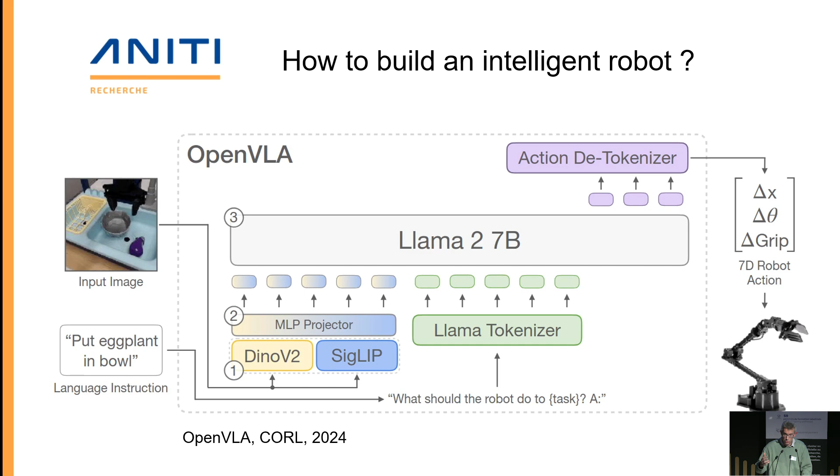But what I will try to briefly tell you is what we think is working, in the light of use cases and requirements which were actually gathered during an industrial panel with companies. We had Schaeffler, the French National Railway, Renault, Airbus, Thales, Robotics Place, and Safran gathering together to give us insight into what they are expecting from us.

So of course, what they would like to have is to be able to replace humans on repetitive tasks where you have, for example, musculoskeletal disorders. We would like to avoid exposure to risks, like for example inspecting railways in a very dangerous situation.

Something we found out very often, for example for Airbus or manufacturing, is the need for flexibility and agility. For example, customers ask for new batches of, say, shells for a cell phone, which you want to customize for a company anniversary. Then you need this flexibility and agility.

And then the last very important point is compliance. There are new regulations, and you need to make sure that your robots are certifiable.

Then in terms of features, they want to have speed, and you will see that it's difficult to get, especially with diffusion processes. They are super, super slow, as I will show.

In terms of imitation learning, what people would like is that right now, if you want your robot doing a backflip, like previous hydraulic humanoid robots, you need a PhD and 2 years of experience with the robot to do that. Whereas what people would like to see is just natural interaction and the robot performing the task.

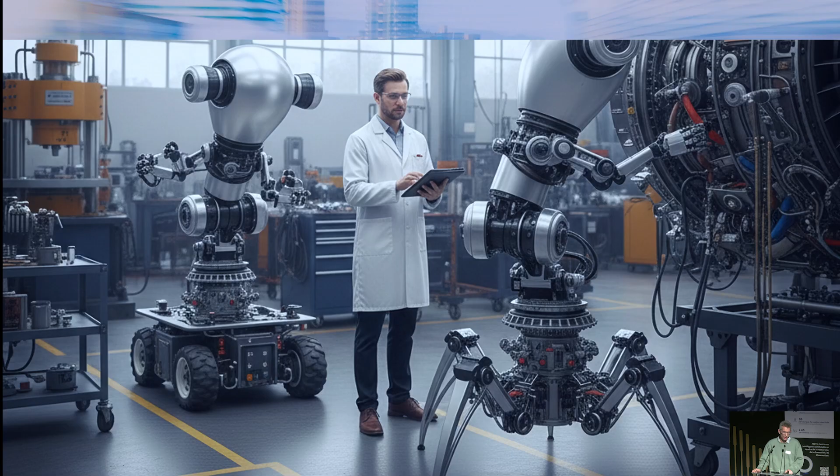And of course, we want the robot to be autonomous. Something I'd like to point out is that a lot of people are talking about interaction with humans. Due to certification and compliance, this is extremely difficult. Most certification requires a laser barrier and the robot being completely shut down when somebody approaches it. So we believe that autonomy is much more something you would like to have. And then I was given this interesting picture where clearly there are plenty of problems.

So for instance, you can see those robots, they have a large base, and having a large footprint robot inside the factory is usually not something that you would like. Actually, specifically in classical robotics or factory, they want to have something much more thin. And you see those robots, despite the fact that they have these large bases, they may fall. And then you need people like me who have studied balance for humanoid robots to make sure that those robots are not falling down. Very often, it's due to the fact that those robots are not able to handle balance that they need to have a strong certification.

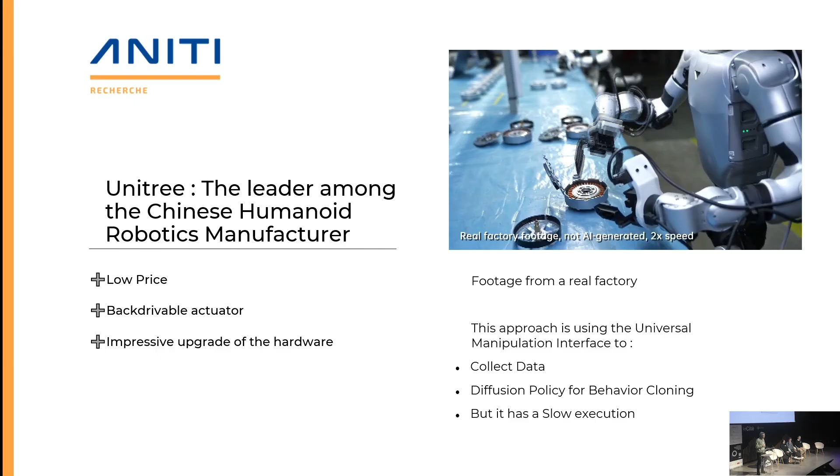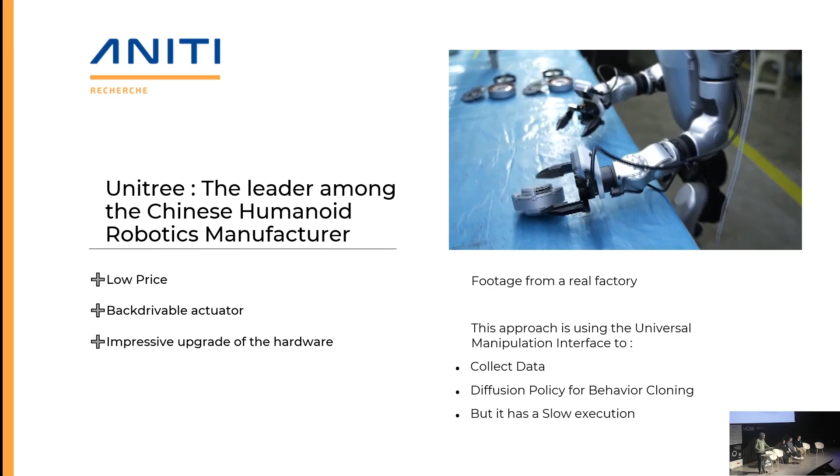And here, the main part is this nice interface called the Universal Manipulation Interface, which is used to do a lot of diffusion processes. But the robot can be much, much faster when you are speaking about very quick motion, but not precise. So in terms of locomotion, it was really a revolution, thanks to backdrivable actuators. And the main point of this Unitree is that they have a really low price, and the pace at which Unitree is improving the hardware is really, really amazing.

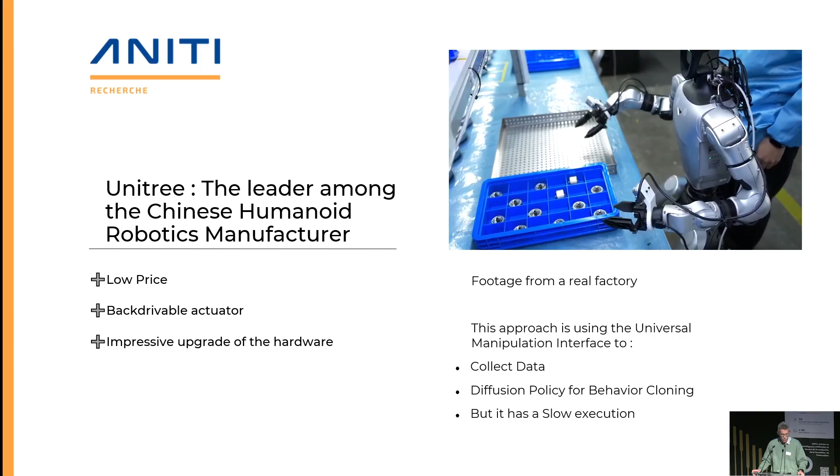Every 6 months we have a new robot being more capable, and this is something that needs money, and I'm glad to see that there are courageous entrepreneurs in France who are trying to build new hardware.

Now, in terms of real application, I'd like to show you the Atlas humanoid robot. So here it's a bit unclear that it's imitation. Well, let's see what the robot is doing with this new space. And when you see this kind of motion, you can know that this is not imitation. Clearly, this is not, it's using optimization.

So what we see right now is a mixture of classical control, very efficient, where you're trying to minimize a reward function, which is going straight to the point. And using, for instance, vision to know where it is and adapt in real time the behavior of the robot.

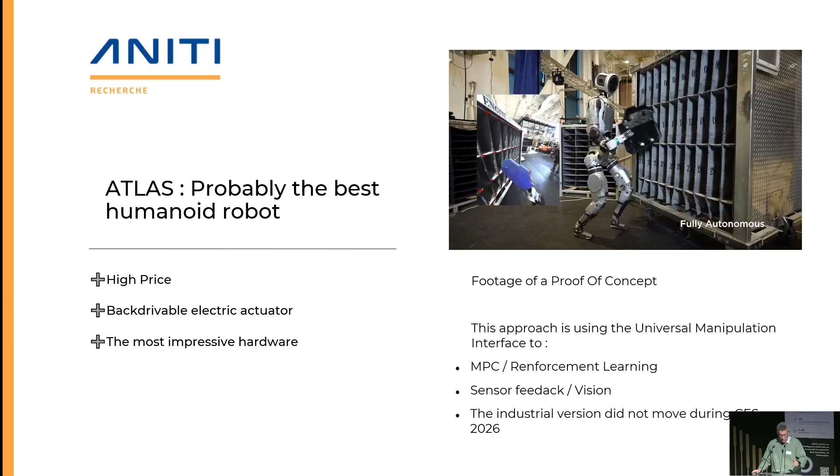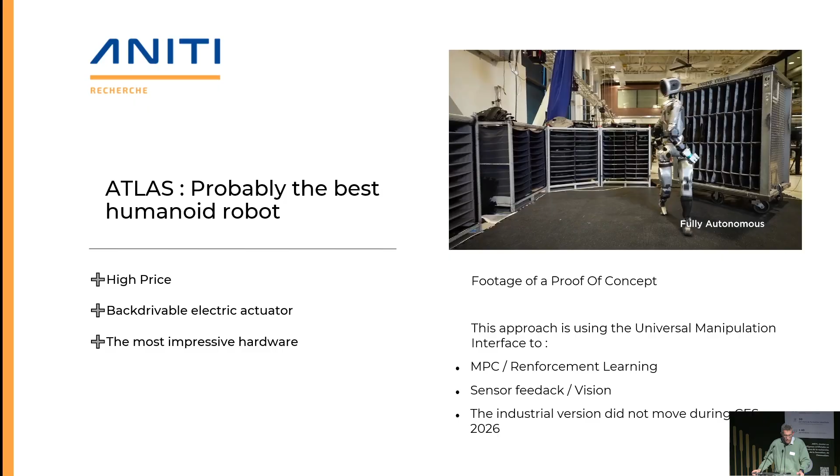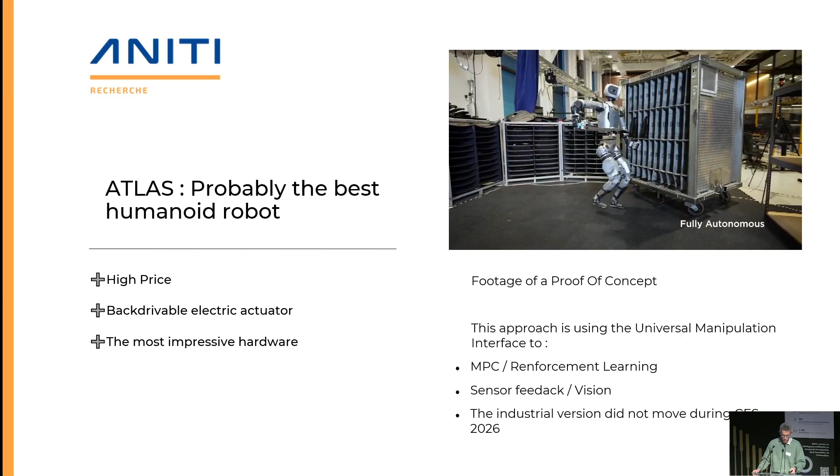Here in proof of concept. This is not a real factory, but honestly, I bet that Boston Dynamics will be the first to showcase real first application, specifically in Hyundai in their mega factory, where they have already introduced, for example, Spot for inspection tasks. The point is here, the high price, this is not clear if it's going to be viable from the business viewpoint. But in terms of capacity, it's probably the first robot that we will see doing amazing stuff.

So what we have done in the chair is, for example, working thanks to Maciej, in the mixture of two reinforcement learning policies. So we learn separately walking and reaching. We were able to apply it actually to the H1 humanoid robot, not yet on the real robot.

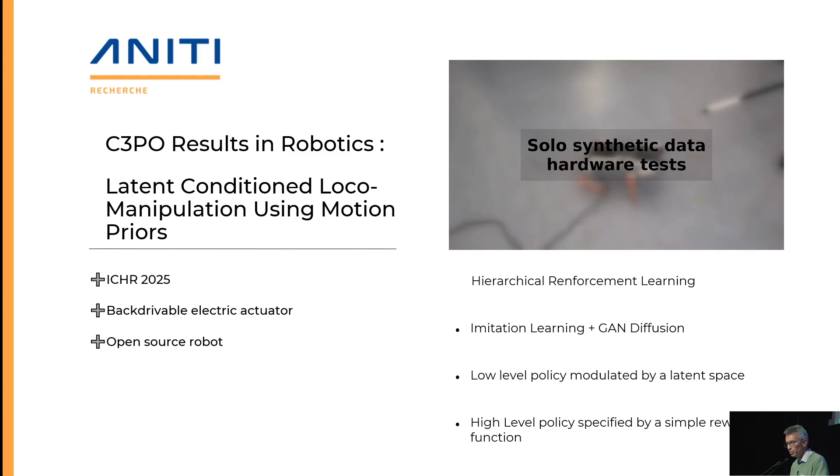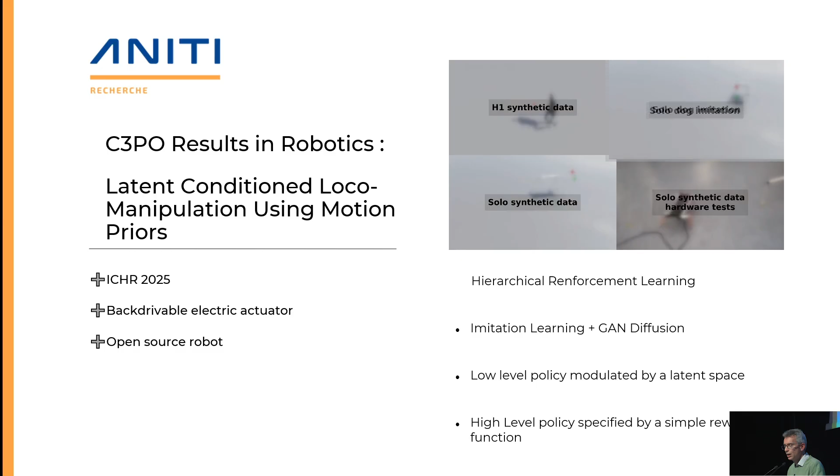It proved to be difficult in the fact that usually the initial approach was using GAN, and those GAN have a unimodal collapse. So we introduced a diffusion representation on the GAN, which allows us to have a multimodal representation of the two initial policies. So with the second one, using hierarchical reinforcement learning, we're able to mix those two with a very simple reward function. So I think we decreased the complexity of deploying this kind of behavior.

And in terms of reinforcement learning, we try to compare classical MPC with reinforcement learning applied on a very unstable robot. So everything is open source. You can rebuild the robot, you can rebuild the power electronics. We also have the software which is open source. And all the benchmarks show it's better than MPC.